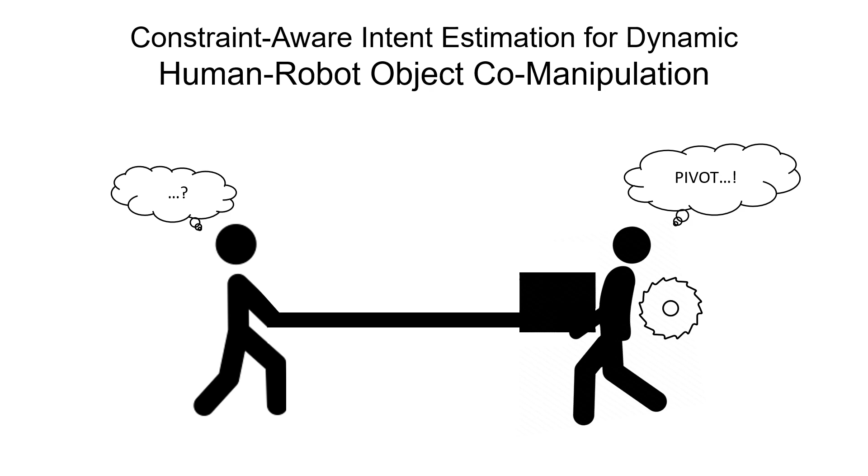This challenge of seamless collaboration is not always solved for a robot partner and is sometimes not addressed even in human-human interaction. Robots are significantly stronger and can therefore be better assistants if we tackle this challenge.

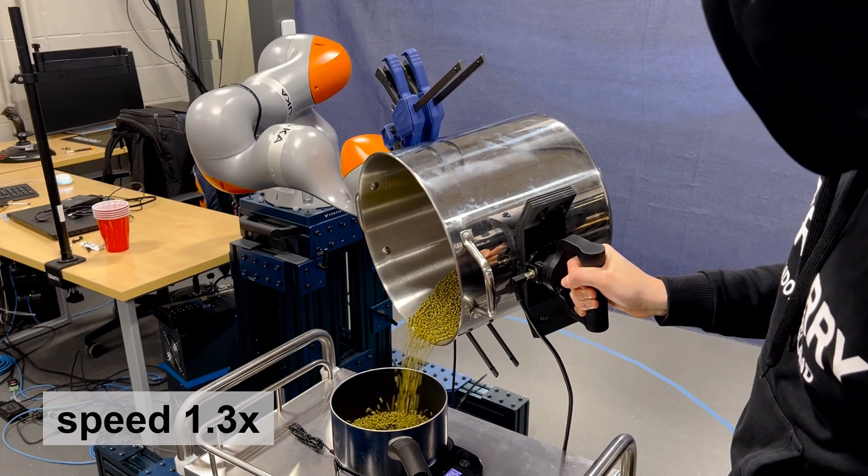In this work, we focus on human-robot collaboration tasks, with the robot being capable of assisting in both Cartesian and rotational dimensions. For instance, when a human requires rolling a heavy pot, the robot should reduce the torque on the human wrist. We think our work is the first step in creating truly interactive robots in factories and homes.

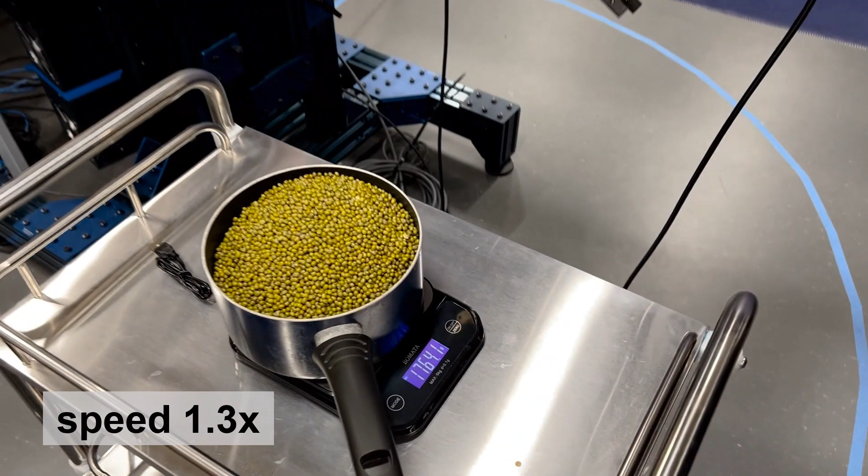We emphasize the importance of object transport to a goal pose in full 6D in our paper, and conduct experiments in 3D for evaluation. We propose a novel intent estimation method while considering constraints for both participants. Our method uses 30% less force and 40% less torque over time than the state-of-the-art collaboration method.

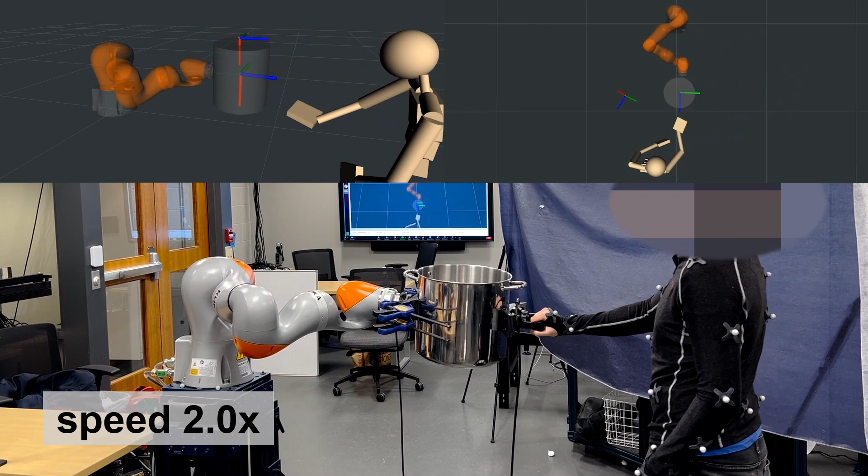Our methods smoothly switch the robot role between a leader and a follower. As a leader, the robot reduces the effort of the human, being more capable than a human partner. As the follower, the robot will follow the human lead in instances of ambiguity.

Human intent estimation is a formidable challenge. Here we seek a representation of intent that is approximately accurate and shows stability guarantees. We begin by modeling the human intent as an autonomous dynamical system directed towards a specific goal pose.

DS-based controllers are robust to disturbances, and combined with an impedance controller, can be used to achieve force-level compliance. Additionally, task dynamics depends purely on motion history, without relying on force-torque sensors.

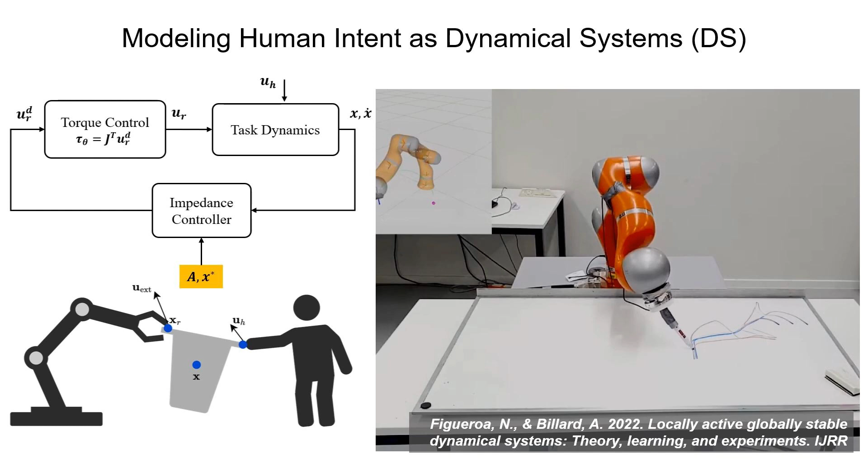However, using only DS to model the intent is not sufficient, since it only follows the specific dynamics of motion and towards a predefined goal or set of goals, highlighted in orange here. In a realistic human-robot collaboration, the goal and the dynamics towards the goal are not known and need to be estimated. Using particle filters, we use past velocities as observations and use Bayesian update to estimate the probability distribution of the goal pose and dynamics matrix.

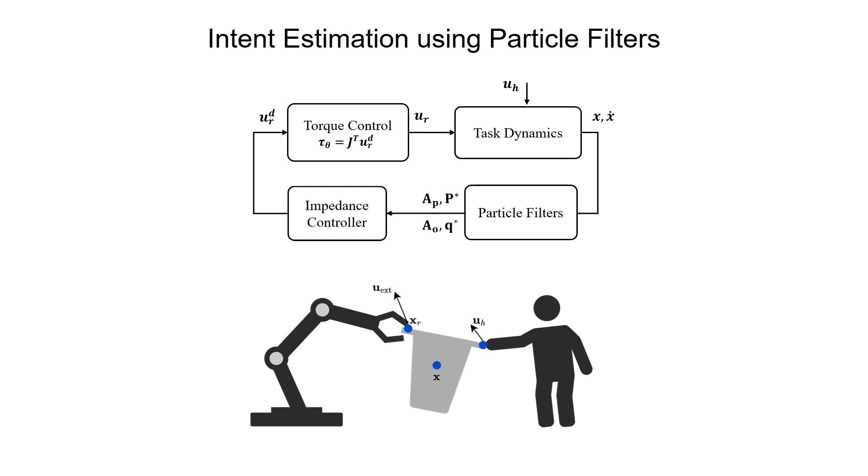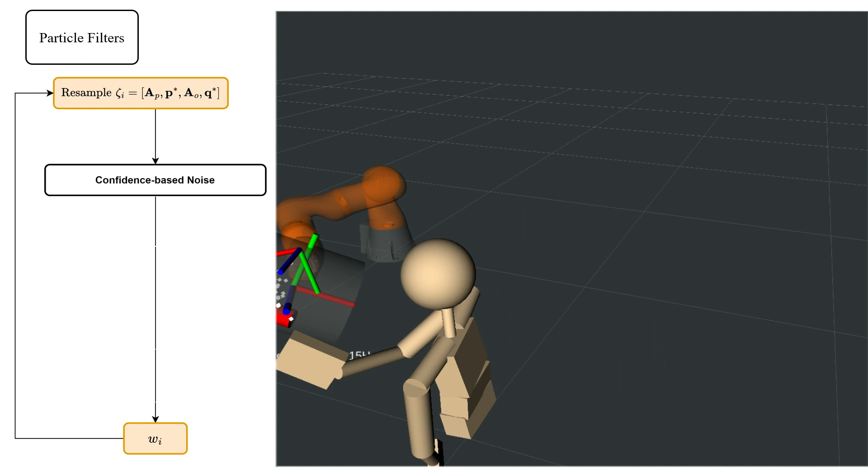We use two separate filters to reduce the dimension of the problem, one for Cartesian coordinates and the other for rotational coordinates. We assume the human has a static intention, therefore the particle filters use zero dynamics models. Intuitively, when the confidence of the estimate is high, a low noise is preferred, so the estimated goal and dynamics stays steady. And when confidence is low, a high noise is preferred for fast changes in the estimation.

Based on the estimated states and dynamic matrices, the velocities and accelerations are evaluated. Particles are then scored based on the error with respect to the expected velocities and accelerations.

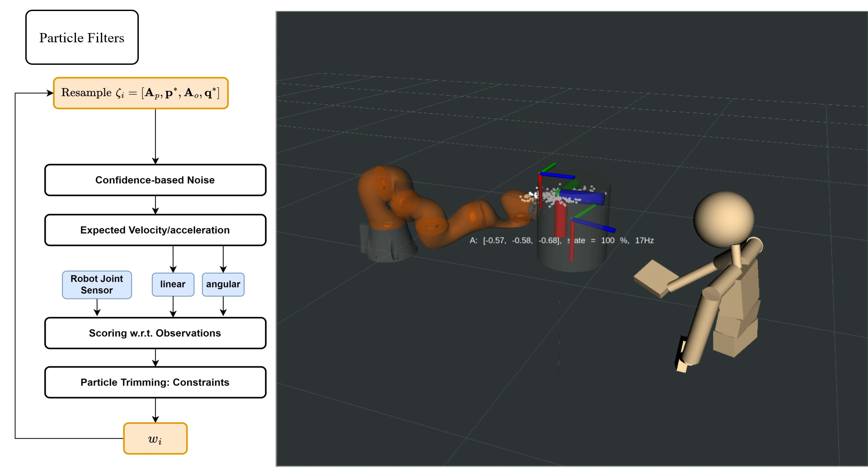We tailor the particle filtering strategy by trimming the remaining particles to also take into account the constraints of both the robot and human. Because humans can freely move in the workspace, they inherently adjust their posture and movements based on environmental constraints. Thus, even though simple, human manipulability can be adopted as an indicator of directional preference, capability, and comfort. We capture human posture during collaboration and reshape the noise of the Cartesian DS based on the hand manipulability ellipsoid axes.

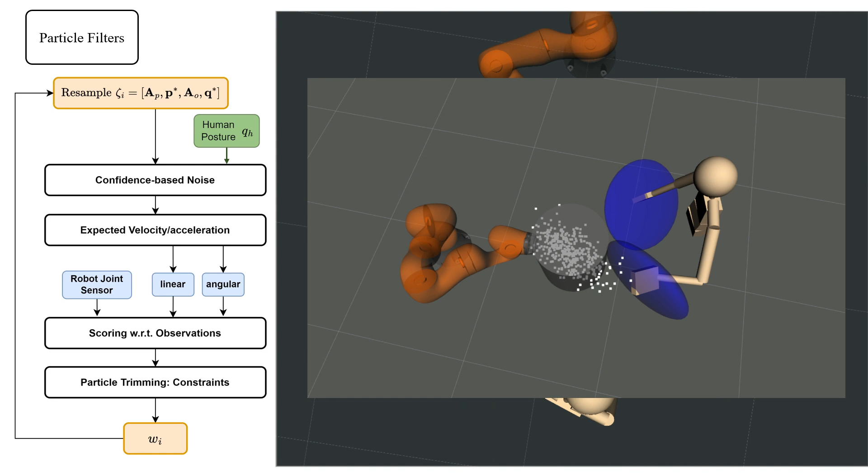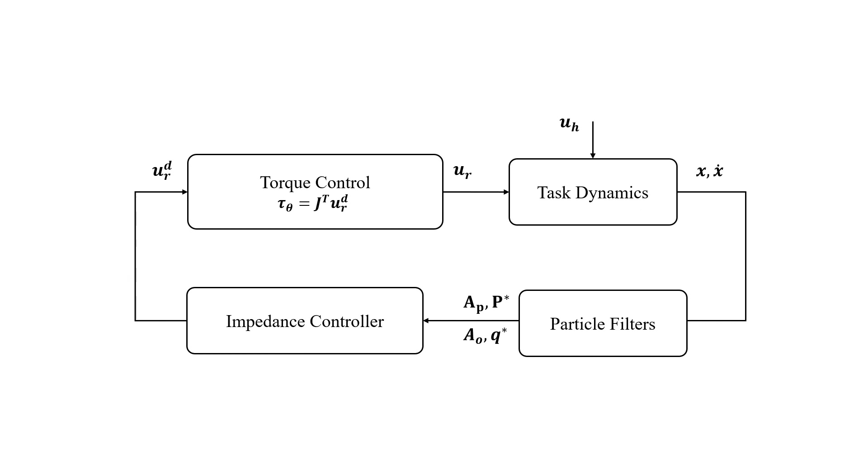To address robot capability, we remove goals that are infeasible for the robot based on inverse kinematics. For computational efficiency, we use cuRobo, a GPU-accelerated inverse kinematic solver. Along with the goal pose feasibility, we also want the robot motion to be feasible. To address this, we respect the joint constraints by generating a repulsive potential to act against violations.

In addition, for intuitive interaction, perceived safety, and for the robot Jacobian to remain full rank, the robot should be kept in a specific joint configuration. This can be achieved by employing a null space controller for a set of desired joint angles.

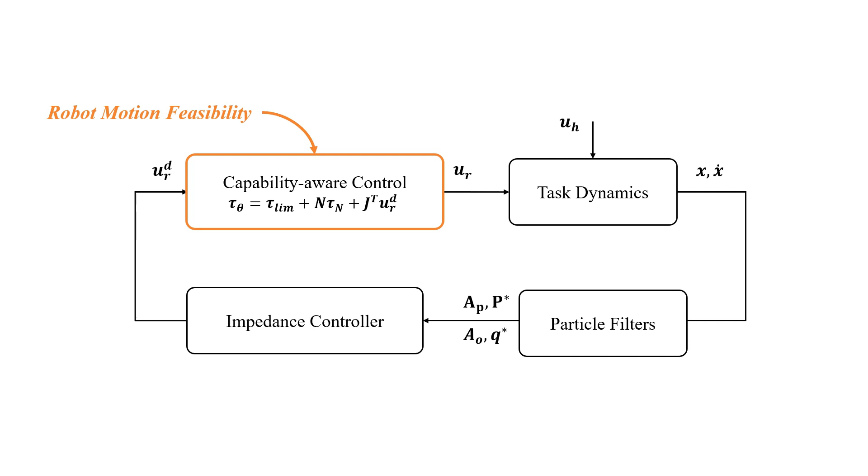Furthermore, the robot needs to adapt its roles by proactively minimizing human effort as the leader, while in instances of disagreement with humans smoothly transitioning into a follower role and relinquishing control to the human. We achieve this by adapting both the noise of the filter and the impedance control gains online.

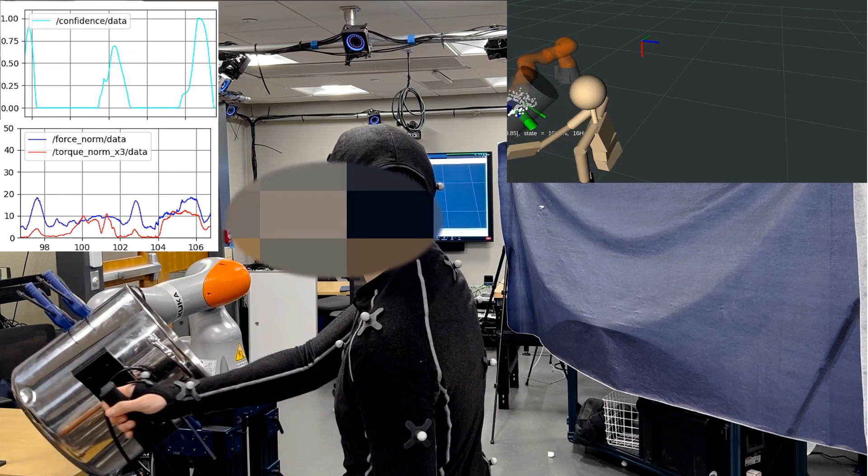Integrating the suggested steps, we devised a game wherein the human is tasked with moving a weighty object toward a designated goal pose, specified by longitudinal, lateral, and roll angles. Upon reaching the goal pose, the task ends, and the team reverts to the center of the workspace for the next goal pose to emerge. Throughout this process, the robot remains unaware of the ground truth goal pose.

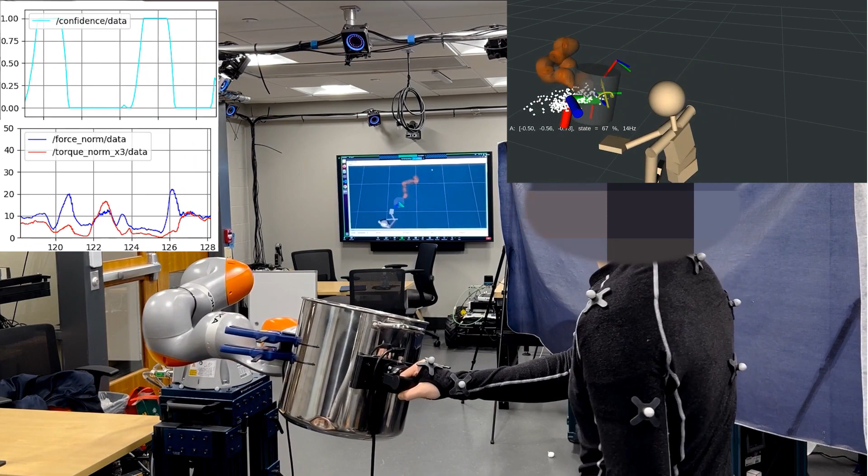The plots show the confidence level and the force torque applied by the human. When human and robot motion is in agreement, the confidence level is high, and the robot leads with a high impedance gain, generating the majority of the forces for motion and deceleration. On the other hand, in cases of sudden changes in human force that result in unexpected motion, the confidence level drops, lowering the impedance gains. In this case, the robot follows the human.

The simulation on the top right shows the influence on particle distribution. At instances of disagreement, particles move ahead of the robot, leading the robot to follow the estimated goal.

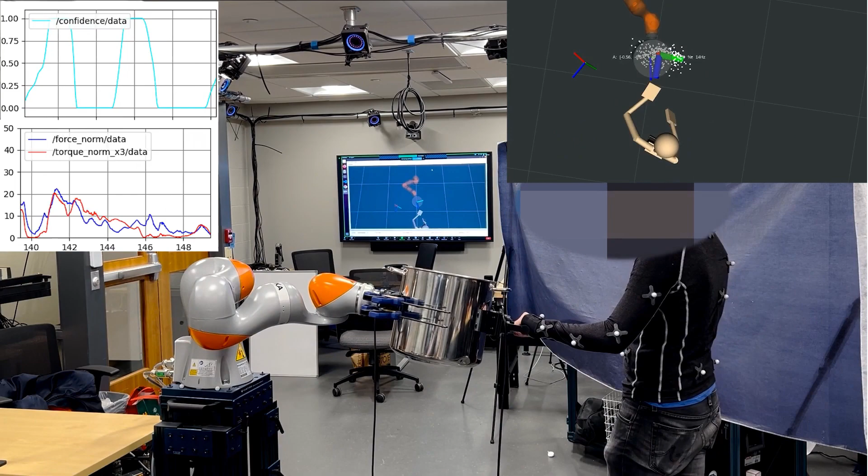Our proposed approach represents a significant step forward in physical human-robot interaction, promising to extend the application of robots in various sectors by ensuring their cooperative interactions with humans are both safe and effective.